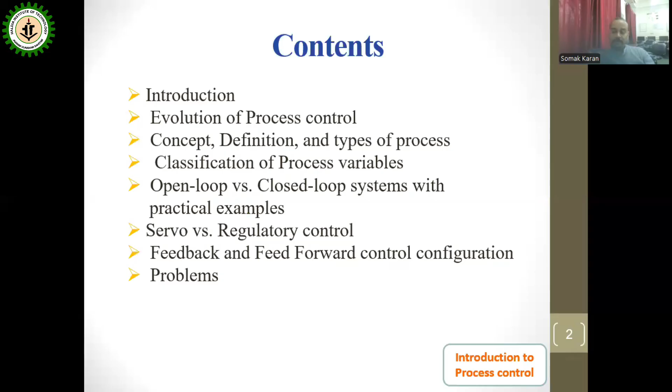So the first part of my lecture will contain such kind of contents, and after that in part 2, we'll be thoroughly discussing servo and regulatory control, feedback and feed forward control configuration, and a few problems that we'll try to understand through the particular discussion.

So if we talk about the introduction part of process control, we have to know first what is the meaning of control. Control means something more precise. To control any person, to control any instrument, what will be required? First, we have to know about the process or about that person very well. So the first thing which will be coming is nothing but the monitoring of the process, or monitoring of the system, or monitoring of the person.

Otherwise we are not able to understand what is the characteristics of the process or what is the characteristics of that person, because we want to control. So the monitoring of such kind of process or person or system is very much important.

Then the next part, for the controlling aspects, we will try to understand what is the purpose of using the control. That means we have to evaluate how the person is behaving, how the process is behaving, how the system is behaving, and what is our desire for how such kind of process or system or person is to be handled. So after the monitoring, the next part will be to evaluate.

And as per the decision taken by the controller or our brain on how to control the situation, then we will try to act. So the three major concerns to control each and every aspect of daily life or the processes are nothing but three words we have to keep in our mind: monitor, evaluate and act.

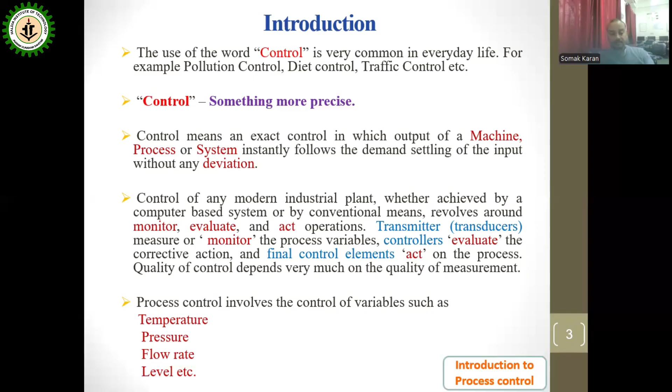So that is a very interesting fact: why such kind of monitor, evaluate and act will be considered as controlling uses, and what will be the benefit of using these three criteria. Process control involves the control of variables such as, mostly, temperature, pressure, flow and level.

If we talk about the evolution of process control, obviously right now we are transitioning from Industry 4.0 to 5.0, but the start was not such kind of things. Initially the handheld instruments or mechanical instruments came into the picture. That is nothing but the manual control we had in 1930. After that, pneumatic instruments came into the picture in 1940.

Pneumatic instruments are mostly considered to be air control instruments. That means pneumatic pressure, or air pressure, has been used to perform the different types of operations of controlling instruments. After that, in 1950, smaller pneumatic instruments, that means sophisticated instruments, came into the picture, and they were adjusted over the decade.

And after that, the analog instruments. So right now we are using 1 to 5 volts, 4 to 20 milliamps. Such kind of signals came into the picture in 1960. After that, the most recent evolution in the process control domain is the implementation of the PLC, programmable logic controller, or distributed control system in 1975.

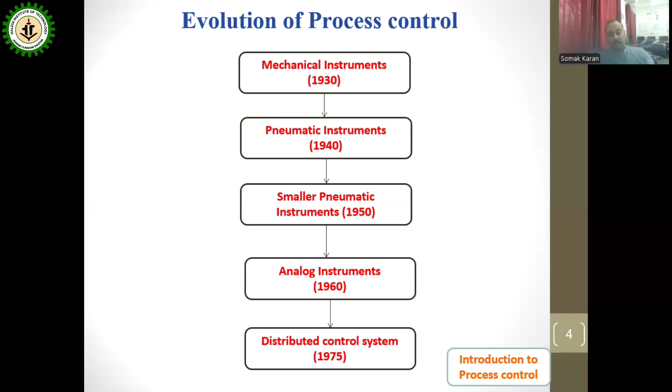After that, all the way it is associated with IoT, with different kinds of configurations of AI and all these things, and we are evolving each and every day in the instrumentation field. So right now we will talk about the concept, definition, and types of processes.

We have already discussed what you mean by control, but what do you mean by process? What is the meaning of a process? We have three types of definitions here. Try to find out and describe each and every point. It is a series of actions or operations conducting to an end. Whenever a series of operations is conducted one by one, at the end we get the final product.

If we talk about the bottle filling plant of PepsiCo, what is the initial phase of the action? Obviously we require some bottles. In the next phase the bottles will be cleaned. Next they go to the filling station, where they are filled with the liquids of the soft drinks. Then they go to the capping area. After the capping area, they go to the packaging area.

So one by one the operations will be conducted. You cannot neglect any one of the operations and jump to the next one. So that is a very important point: a series of actions or operations conducting to an end, a systematic series of operations in a production.

If we talk about an oil plant, initially we take the crude oil. This crude oil goes through the distillation column and the purification stage, and then we get different types of products like diesel, petrol, aviation fuels, gasoline, kerosene and so on. So a process is a systematic series of operations in a production.

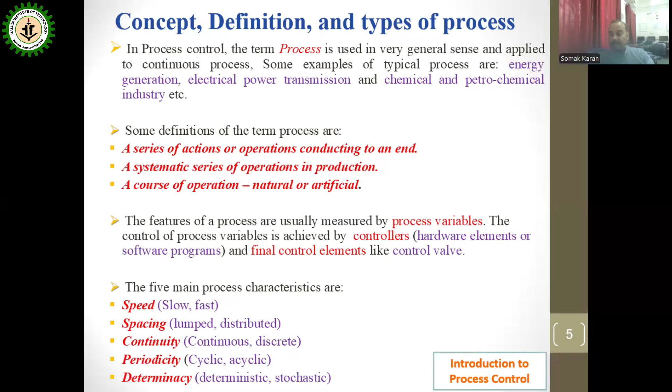The final control element, for industrial aspects, is in most cases the control valves, because we are dealing with pipelines. Maintaining the flow rate of liquid, steam or other things in a pipeline can be done by the control valves. The five main process characteristics are the speed of the response, spacing, continuity, periodicity, and determinacy. These five main process characteristics will be the major discussion of the concept behind process control.

The very important slide we are trying to discuss right now is the classification of the process variables. Whenever we consider a process, the process has some input and some output. This input is divided into two parts: one is known as the manipulated, the other is known as the disturbance. Manipulated variables means which we are able to control, and then the disturbance.

A very good example: we try to maintain the room temperature of our classroom or our lab, so in such cases the AC will be the major part of the discussion. At that particular time, the room temperature can be considered as a manipulated input variable. If it is a very hot summer and I measure the initial temperature of my classroom, maybe it is 35 or 40 degrees centigrade, and the set point given is 24 degrees centigrade, so we will find the error and take the corrective action. Whatever parameters we are able to measure can be considered as manipulated variables.

Now the disturbance. In the example I mentioned, in a classroom or lab we are suddenly opening the doors whenever a student or faculty comes in or goes out of the room. At that time, the ambient temperature will affect your classroom temperature, so it can be considered as a disturbance. Disturbances are not always measured disturbances. The opening and closing of the doors is a measured disturbance, because it is known to us that people will come and go out of the room, and it needs to be considered in our discussion.

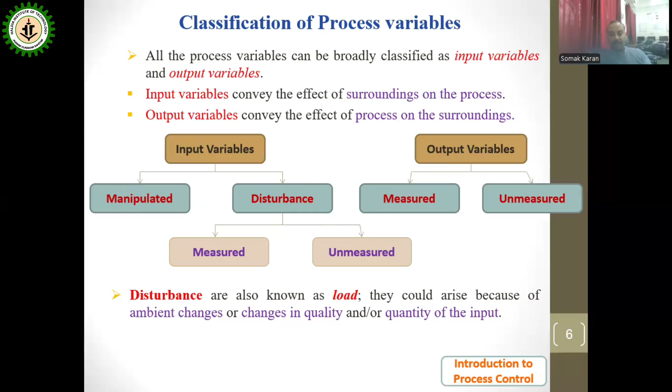as output variables. One very good example we have taken is the CSTH, continuously stirred tank heater. In this tank heater we have the feed, meaning the liquid coming into the CSTH, and we have a steam line through which we heat up this liquid and take it out of the chamber. So if we talk about the input, here we have the feed, and the feed is considered as two parameters: the flow and the temperature, denoted as Fi and Ti.

Another two inputs are FST, the flow of the steam, and TST, the temperature of the steam. So here we have mentioned the input and output variables using this example. FST is the steam flow rate, Fi and Ti are the flow rate and temperature of the feed. F0 and T0 are the flow rate and temperature of the outlet stream of the CSTH. Liquid level is denoted as H, and the amount of heat transferred to the liquid is denoted as Q.

So if we talk about the input variables, obviously the feed needs to be considered, which is Fi and Ti. The other inputs through which the temperature changes are FST, the flow of the steam, and TST, the temperature of the steam. What are the output variables? The output variables are the output of the liquid. So F out or F0 is an output variable, and T0, the outlet temperature, is also considered an output variable.

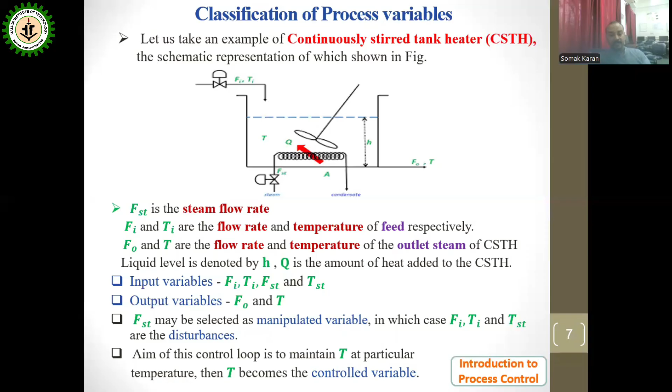Now we'll talk about open loop and closed loop control. Open loop means we are not taking any type of feedback from the output side. I have just given you the example of a fan, where we have given the input of the power. After that, the controller will decide how much speed of the fan we have to regulate, and then the respective control action is generated to the process.

So whenever we give the output from the controller to the process, we have to be very careful whether the output of the controller will be implemented in the process or not. As I already mentioned, we have given the fan speed of 1, but my fan is running in full speed mode. That means my process is not at all considering the decision of the controller, and we are not able to identify it, because there is no feedback from the output side.

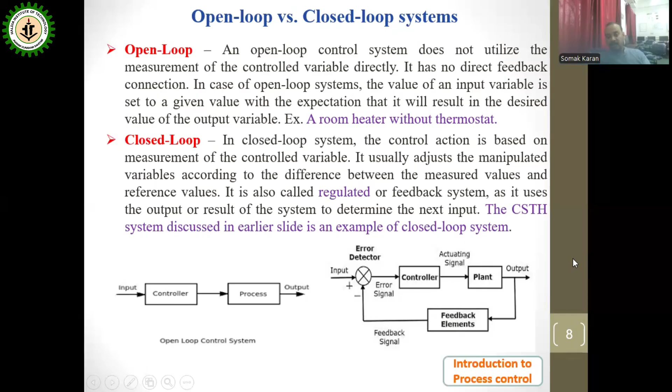Whereas if we go for closed loop control, feedback will always be measured, error will be detected, and according to the change of error, corrective action is taken by the controller. Next, for the practical example, you can see we have two examples: the ceiling fan and the air conditioning system. The ceiling fan I have already described as an open loop system, whereas the AC, or air conditioning system, will be considered a closed loop system.

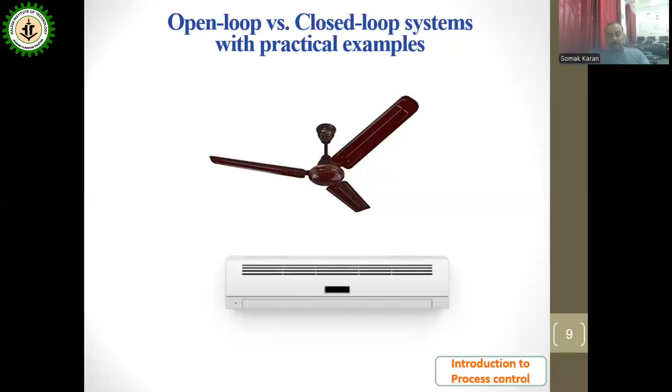So if we look at how the information is transmitted in the closed loop system: whenever we switch on the AC, firstly the measurement sensor will identify the current temperature of my room. Maybe it is 40 degrees centigrade, and my set point value will be 24 degrees centigrade, so the error will be 16 degrees centigrade.

So the controller will take the corrective action or decision, and the controller output signal will be given in the form of 4 to 20 milliamps, or any type of current signal, to the final control element. For the AC, the final control element is the compressor. The compressor will compress the air. Using the very basic formulation of PV = nRT, if your pressure increases, the temperature also increases.

But using the expansion valve, we are able to reduce the temperature of the air, go through the evaporator section and the condenser section, create the airflow and heat exchange with the inner air of your room, and reduce the temperature of your classroom. As for disturbance, the opening and closing of the doors or the opening of a window can be considered a disturbance.

So whenever the process is in running condition, the present value will reduce after a certain period of time once the controller has taken action. With this action the controller tries to reduce the error between the set point value and the present value, and whenever the set point and the present value are the same, the error will be zero, and the controller will indicate that we have reached the set point value or the desired condition.